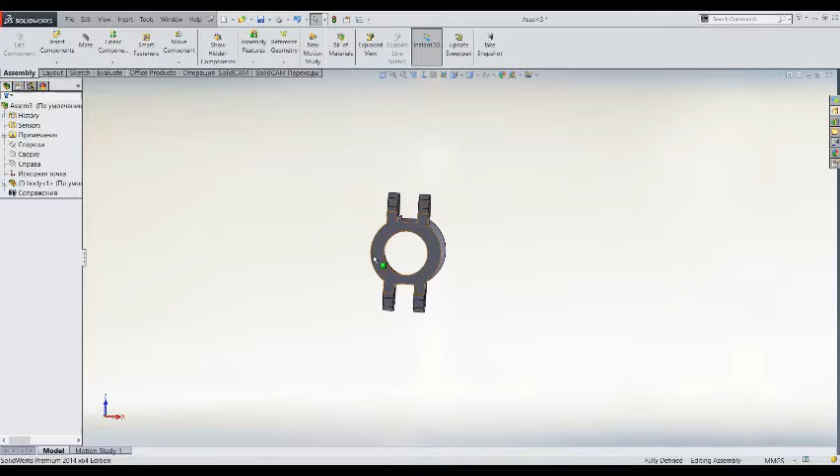Next step, we need to insert screw, and also screw nut.

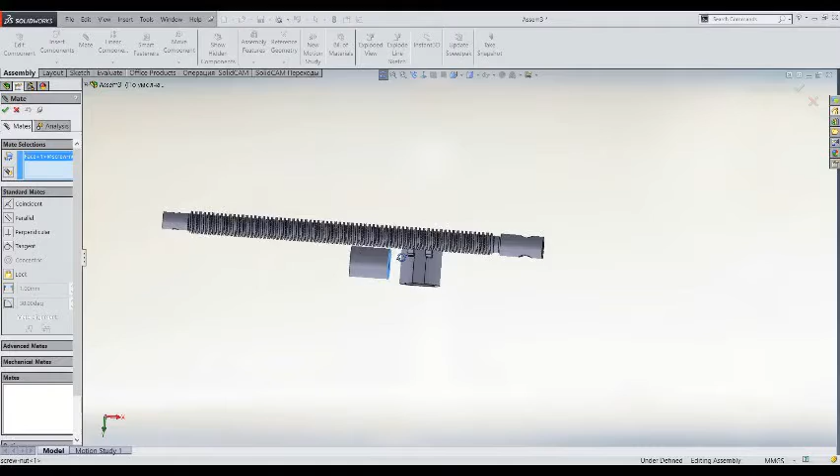We select a mate, then we choose concentricity between the body and the screw nut. Then we need to choose the screw concentricity with the body.

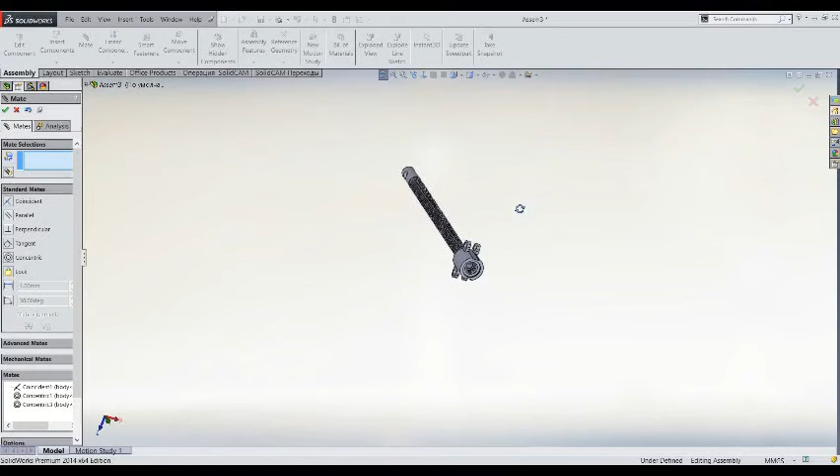It should go like this. Then we need to insert 2 grippers and 2 washers.

Then we need to insert nut for pin. So then we need to choose 2 bolts, bolt pin and 2 nuts.

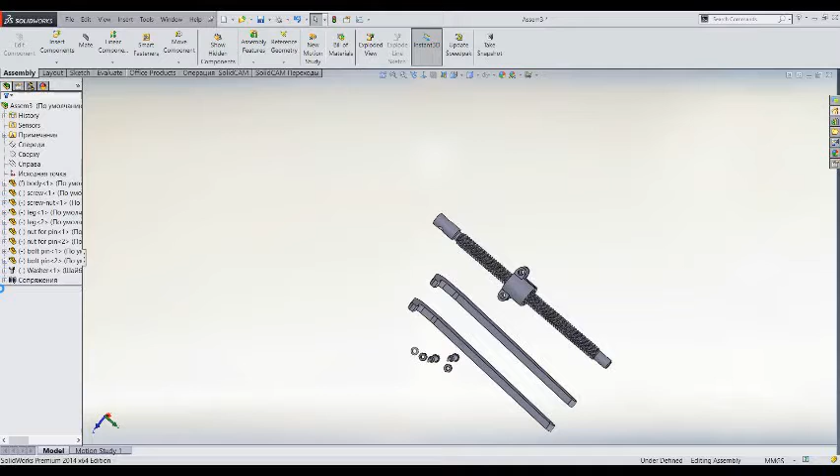Set up pairing. Washers align with nut and washers align with bolt.

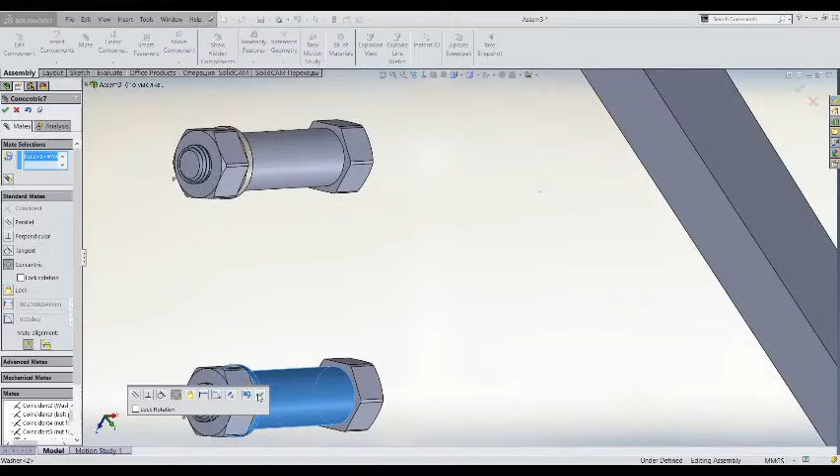Again, we set concentricity, but since it is wrong, you need to change the position to the other side.

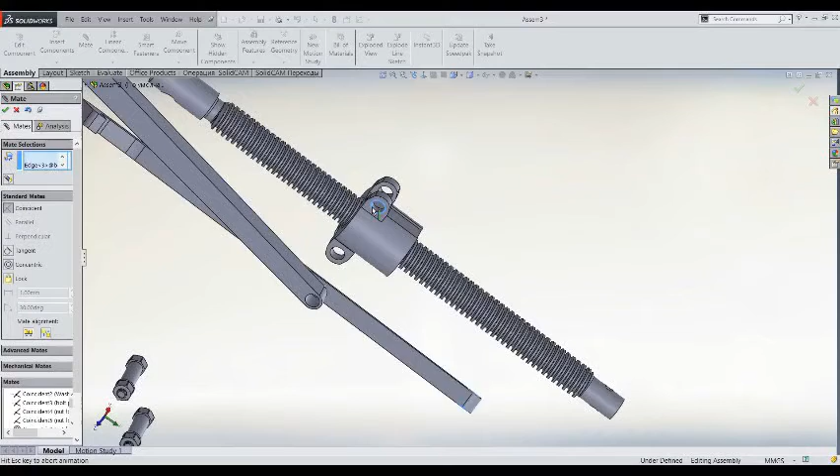So again, we need to connect grippers, or legs if we can say like this, with the body, and screw nut.

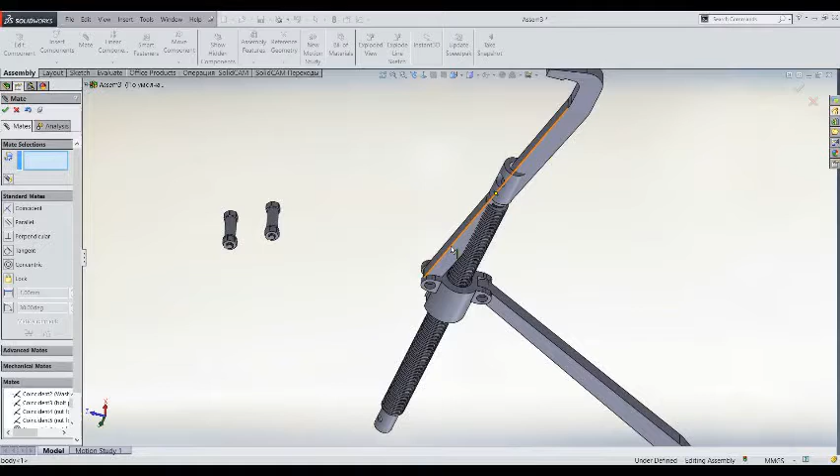Now we can insert the pins. Align the bolt pin, there should be no gaps.

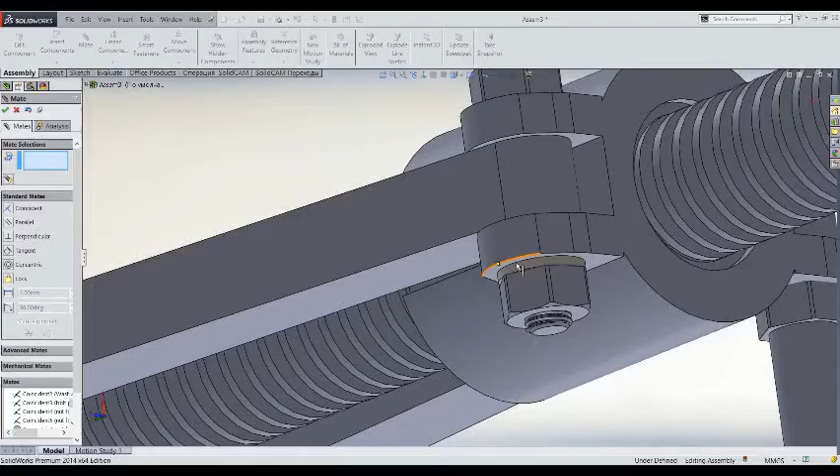Insert the handle and caps.

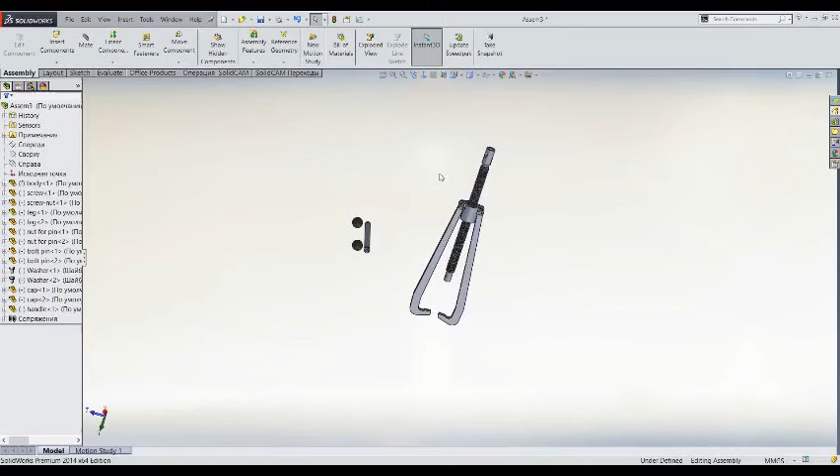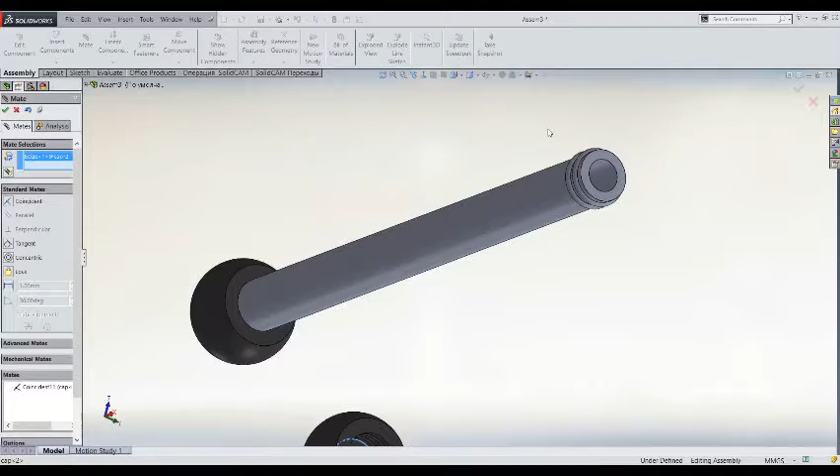Pairing, choose the ringlet, change position, duplicate to another cap, and insert into the handle.

We open the plane on the top of the screw.

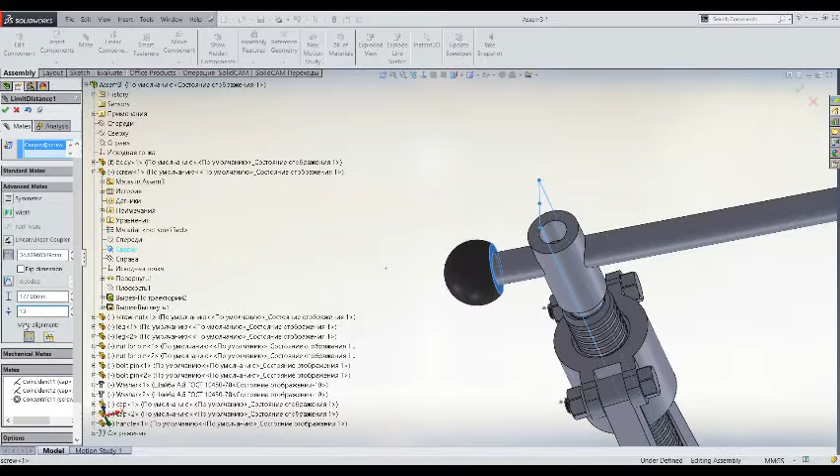Choose 177 and 13. Because the distance from this point to the end we have 190, but the diameter is 26, so you need to have a little space to move well.

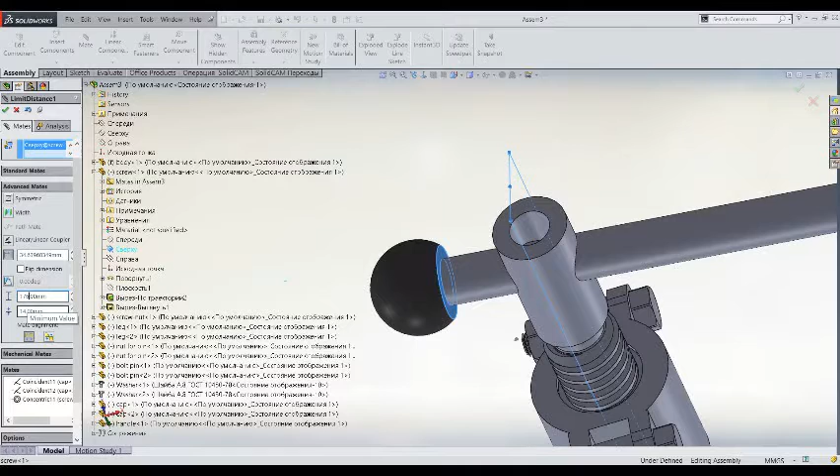We will deal with the bottom. Insert the pin.

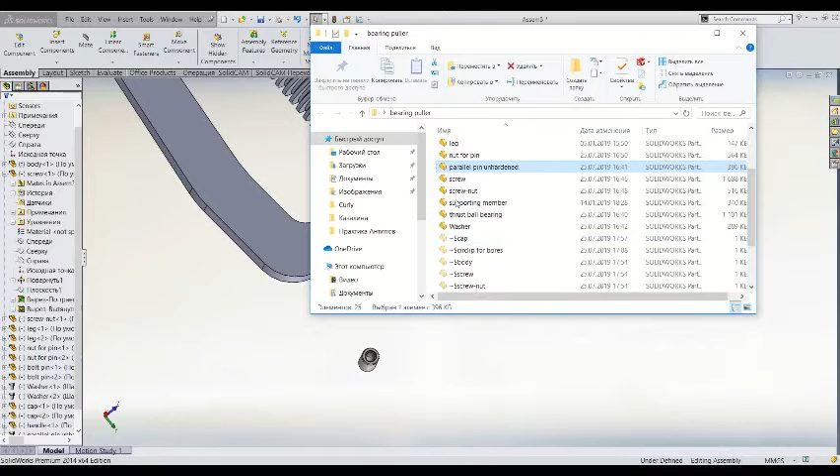So we need to insert the pin, also thrust ball bearing. Then we need to insert supporting member.

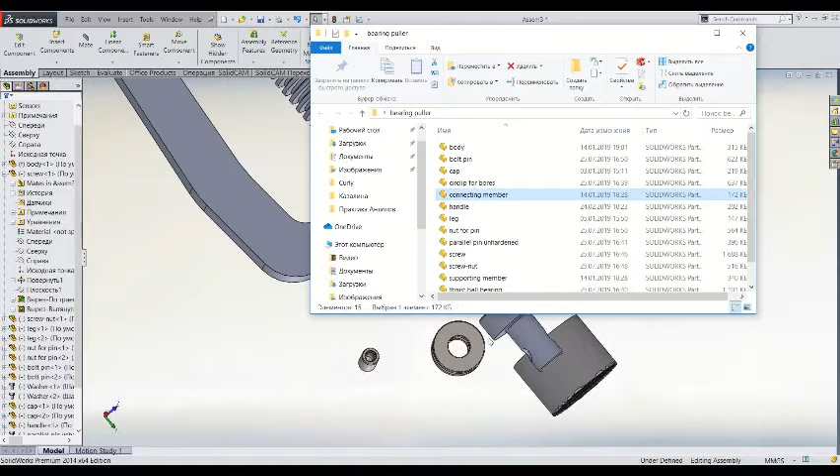And also connecting member. Expose pairing, catching concentricity.

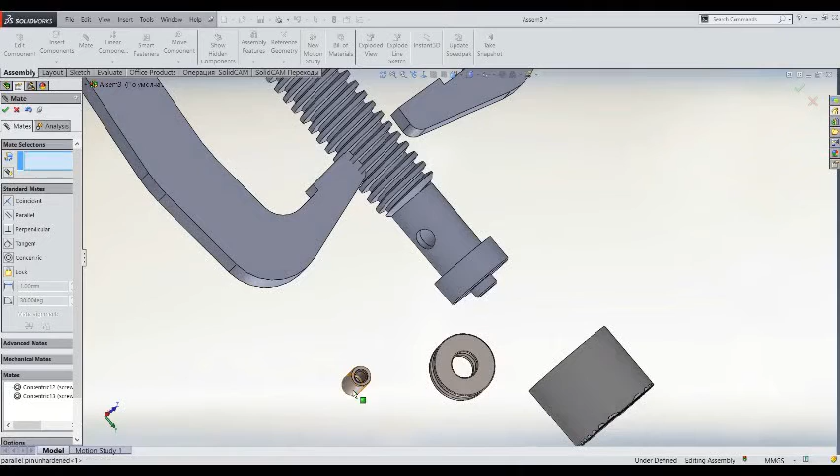Install the pin. Tangency.

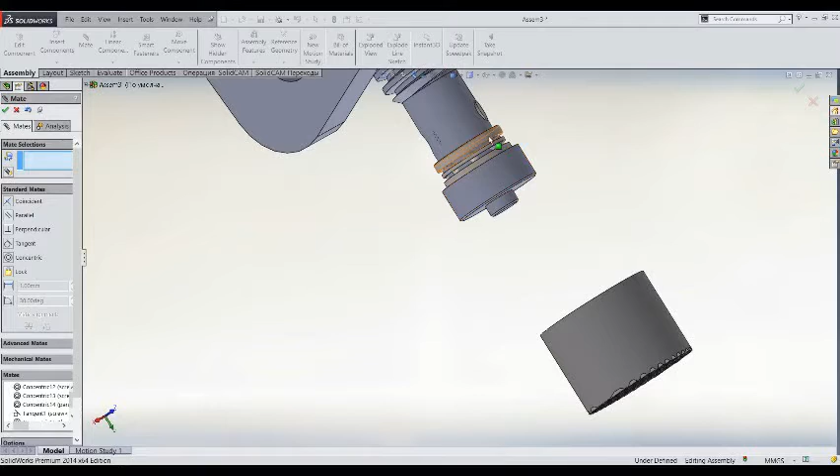Put the bearing back to back. Again, concentricity.

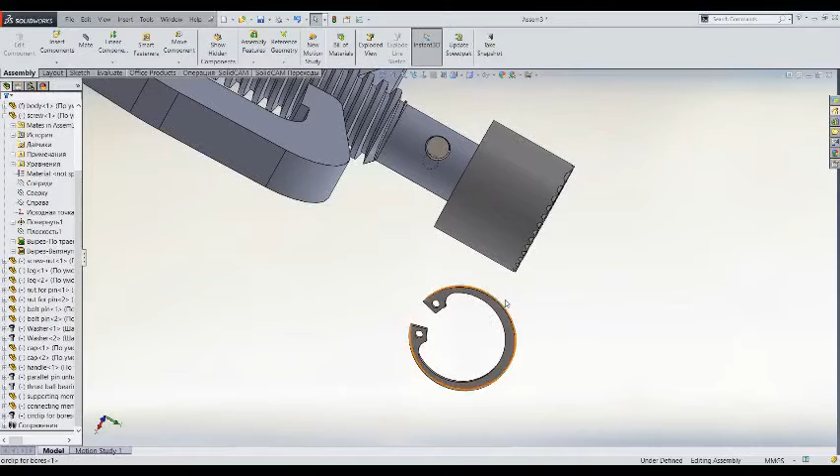And the last part. Circlip in a diameter suitable under the support.

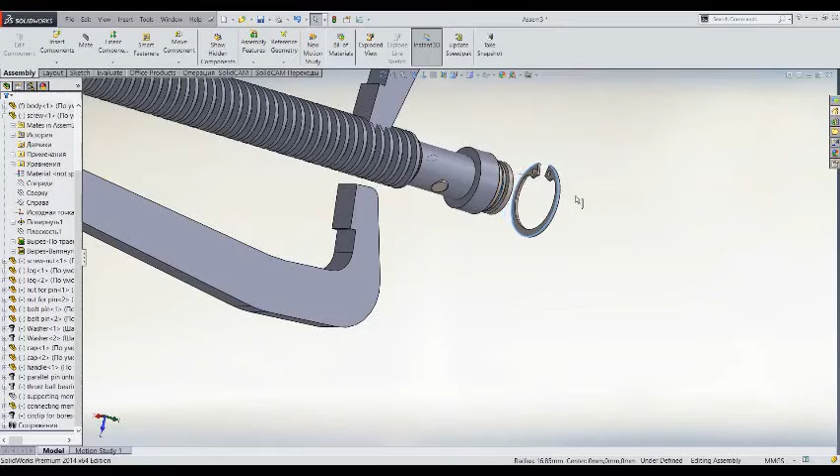Concentricity. There is a special slot inside.